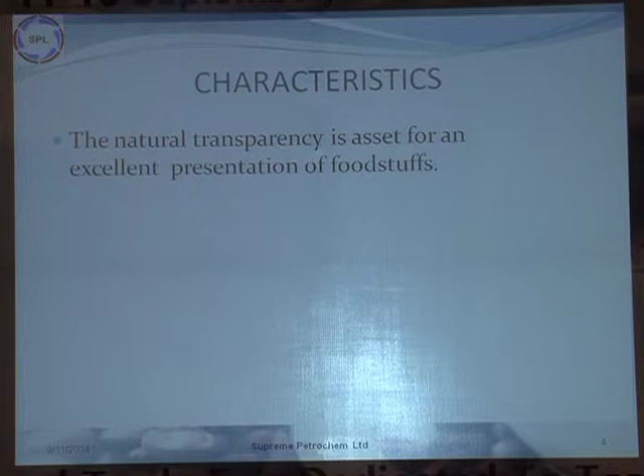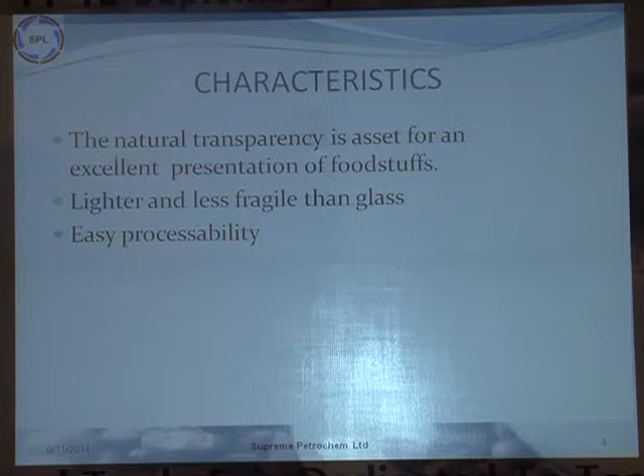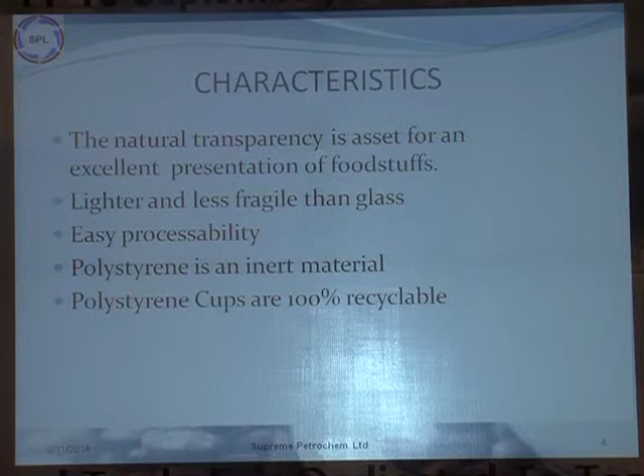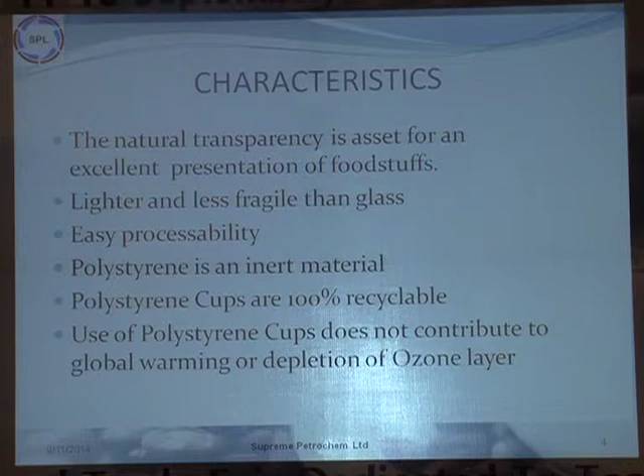So what are the characteristics of this polystyrene material, especially GPPS or clear polystyrene? It has natural transparency, giving an excellent presentation to whatever foodstuff you offer. It's very light and less fragile than glass. It can be processed easily on conventional machines, and doesn't require any skilled labor. It's an inert material, so there are no questions about contamination with food, and it is 100% recyclable. So from the sustainability point of view there is no problem, and when processing these polystyrene cups, they do not contribute to global warming or depletion of the ozone layer, as is feared by many environmentalists.

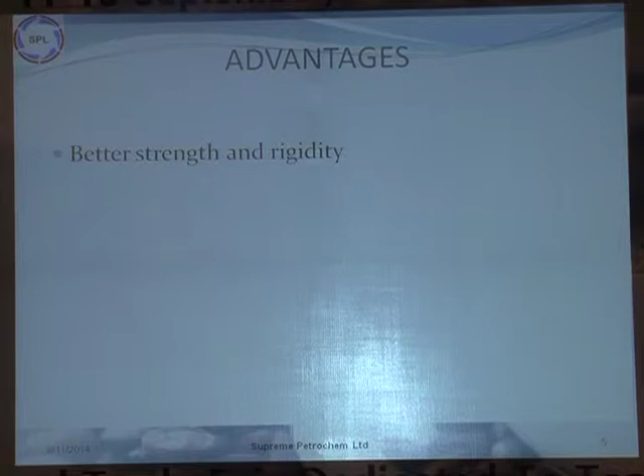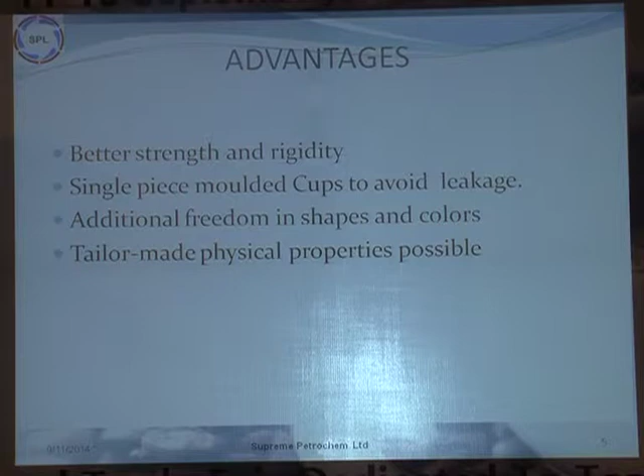The advantages: being light, you get better strength and rigidity. It's a single piece, so there are no possibilities of leakages. You have additional freedom in shapes and colors, and can tailor-make the physical properties. You have increased food appeal, and you get the best value for serving cold beverages as well. Some display examples are given here.

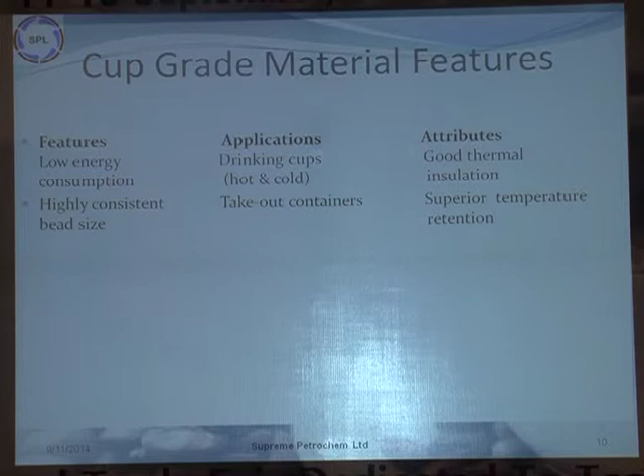What are the features? It requires very low energy. It is used for drinking cups, hot and cold, and the main attribute is it offers thermal insulation. There are some technical terms and other applications which I will skip as they don't have relevance here. In terms of specification, what makes this material so specific?

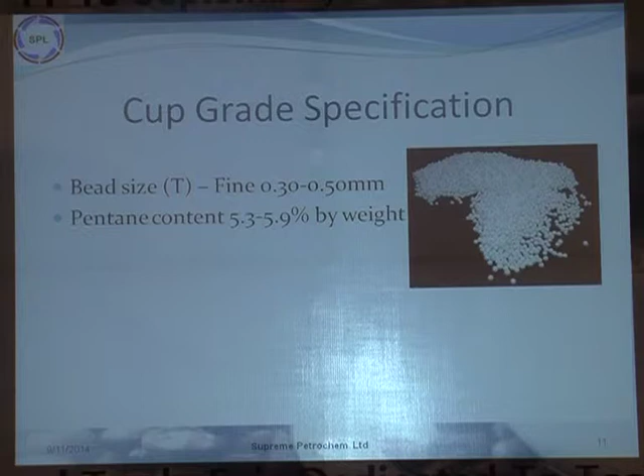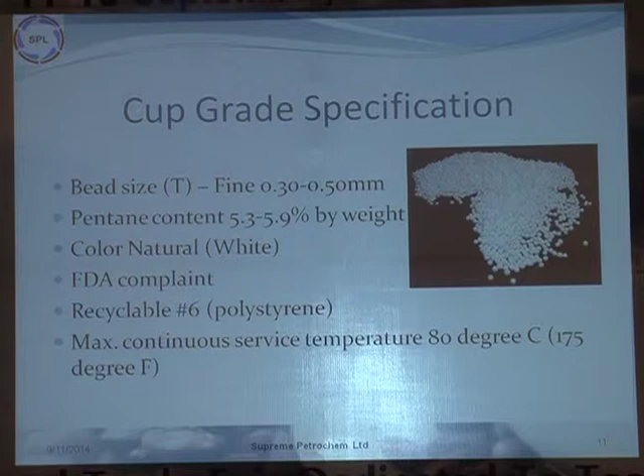The first thing is the very fine bead size. None of the companies in India make this fine bead size of thermocol beads. The pentane content - pentane is a gas used for increasing or making it a foam - has to be controlled at less than 6% by weight. It comes in a very natural color, and it is FDA compliant. We have this material approved by US FDA. Not all materials can be approved by FDA for food contact applications. Again, this is recyclable, being polystyrene, and you can use it for continuous temperatures up to 80 degrees centigrade.

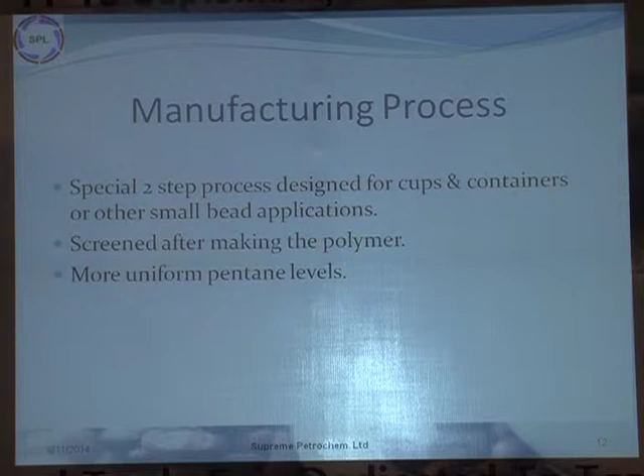What is the manufacturing process that gives this type of specification? It's a very special two-step process, and this particular process is available in the world at only 3 places. We are very proud to say that other than the US and Europe, we are the only company in Asia to have this process for making small bead applications. The screening is done after the polymer is made, pentane levels are maintained uniform, and the resin polymerization is done to get the optimum results.

The process benefits in molding include a uniform product and very good molding cycle times. You have overall higher efficiency levels, and the final product has a better surface quality.

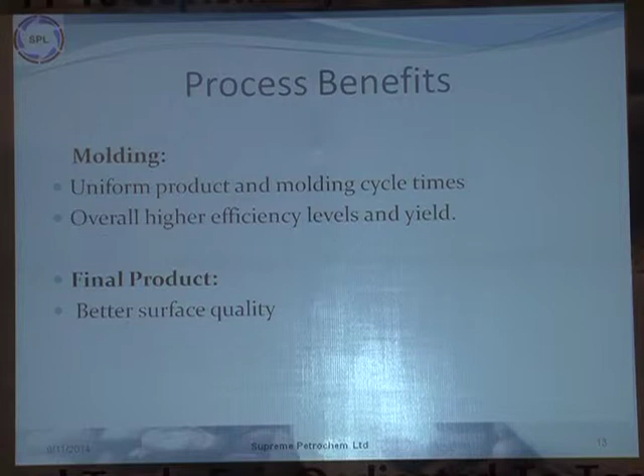I invite all of you to come and have a look at the various samples we have displayed at our stall. It has a very different finish and it's really appealing. The printing also depends upon the surface, and in this case it's much better.

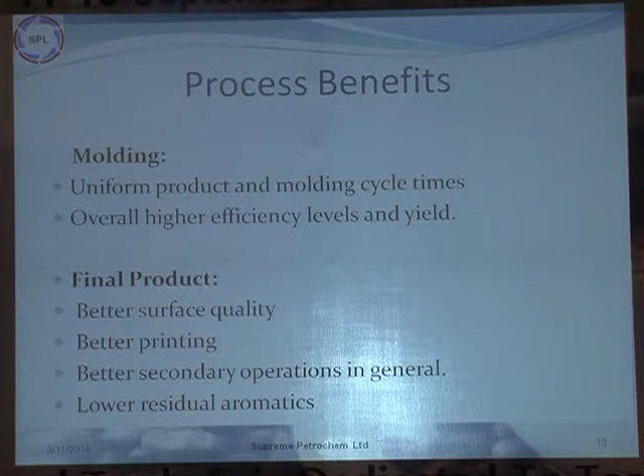Again, EPS cups are made from a two-step process. The material, because of the insulation, keeps hot beverages hot for quite a long time, and it protects hands from burns.

I will show you some examples later on. Again, it's lightweight yet rigid, so there's no problem in holding. And to meet environmental norms, it is CFC and HCFC free, which are known to damage the ozone layer.

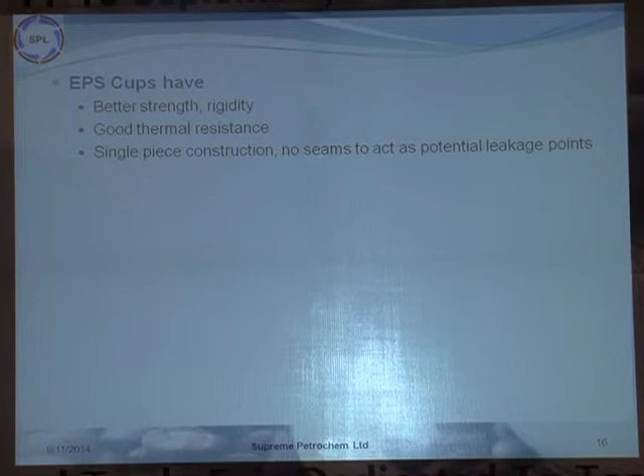Now when you use EPS cups, because of better strength and rigidity, good thermal resistance, and single piece construction, there are no leakages.

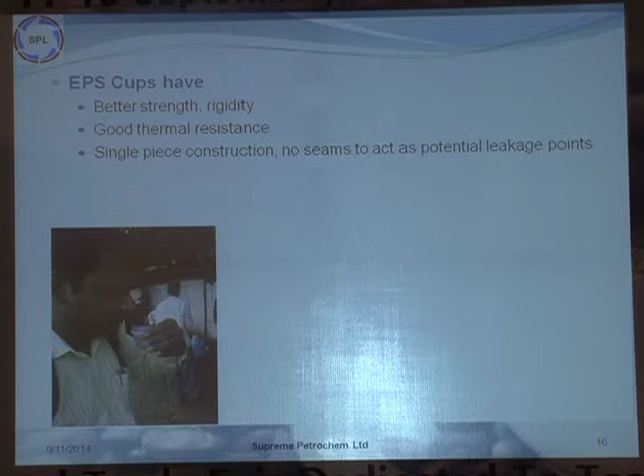It's a very common sight that people hold it at the brim of the cup because they cannot hold it comfortably in the center.

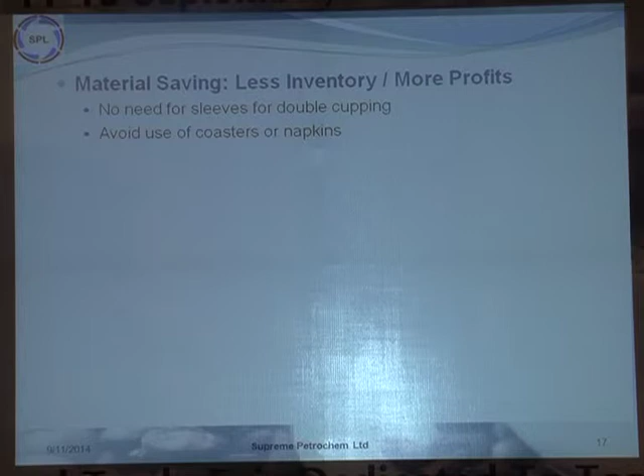How do you get the material saving? Now, because you are using a single piece cup, you don't require any sleeve for double cupping, and you don't require any coaster or napkin to support it. So this is not required.

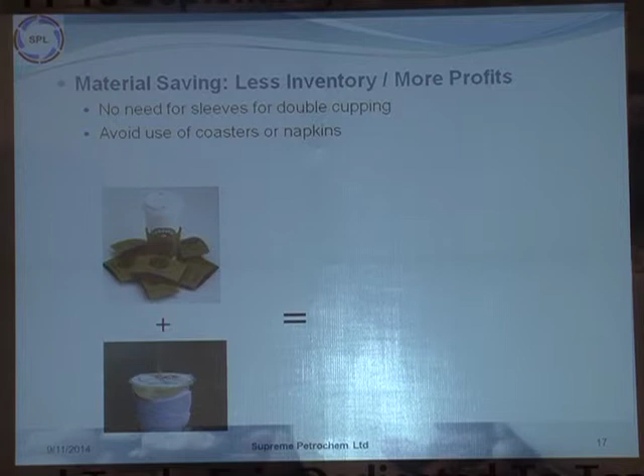Also this is not required. So what you can use is a single cup, and this basically saves money. People normally compare cup to cup, but they don't take into consideration the cost of the sleeve, the napkin, or the additional paper which is used.

The EPS cups in India, traditionally we have seen that they come only in white color. But excellent branding can be done, and you can eliminate paper sleeves.

Branding is possible. Branding is required for product enhancement and advertisement. Now how can it be done?

You can do it by labeling, where you put a paper label on top of it. This paper label is removable, so the two things can be recycled immediately.

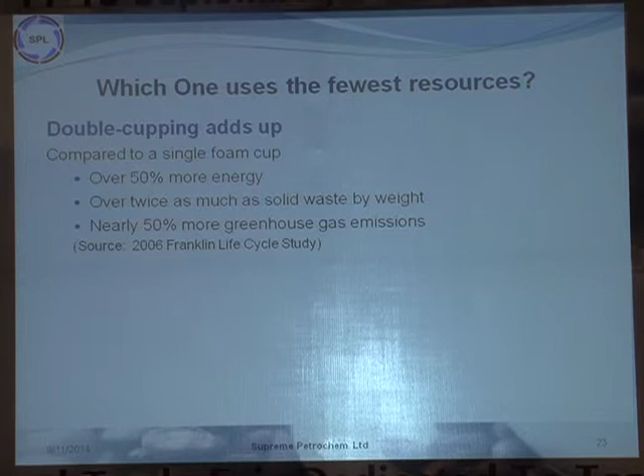Even uncoated paper cups require a lot of steam, chemicals, and electricity to process paper from wood to paper to the paper cup. According to one report, 'Is Paper Better Than Plastic,' a study by Dr. Martin Hocking gives a detailed analysis of how many chemicals are used and their contribution to water pollution.

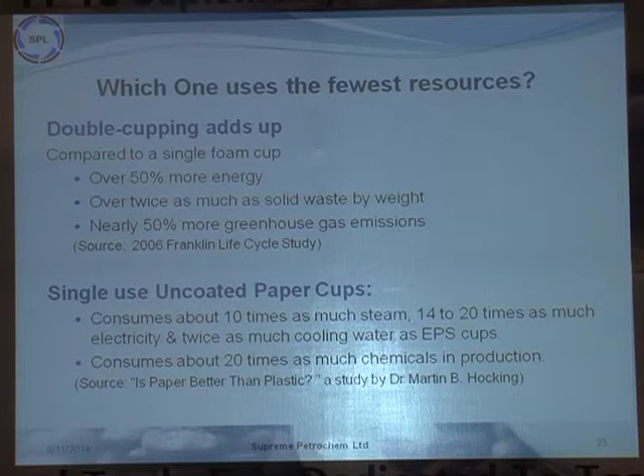These are tabular presentations of disposable cups. Like one ceramic cup - yes, you can reuse it, it can be used a number of times. But the energy used for one ceramic cup could make 39 paper cups, or 1000 foam cups. So within the same energy, you can serve 1000 people versus just one with a ceramic cup.

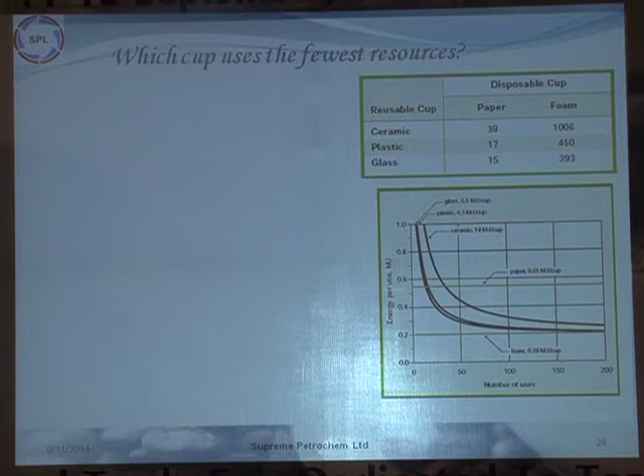Same comparison applies with plastic and glass. Here is the graphical presentation of this. This was again generated by Dr. Martin Hocking on reusable and disposable cups, an energy-based evaluation and independent study in the US.

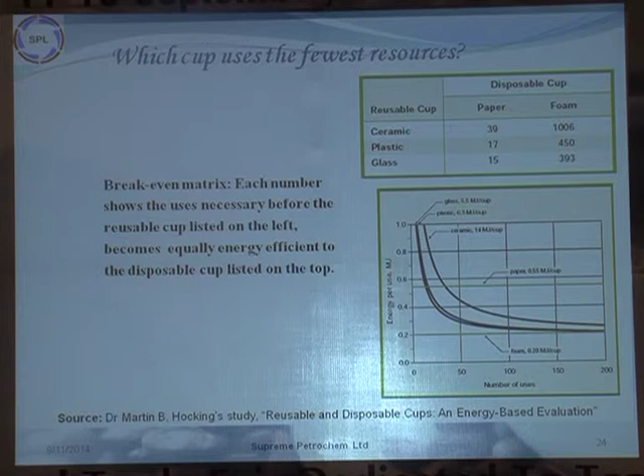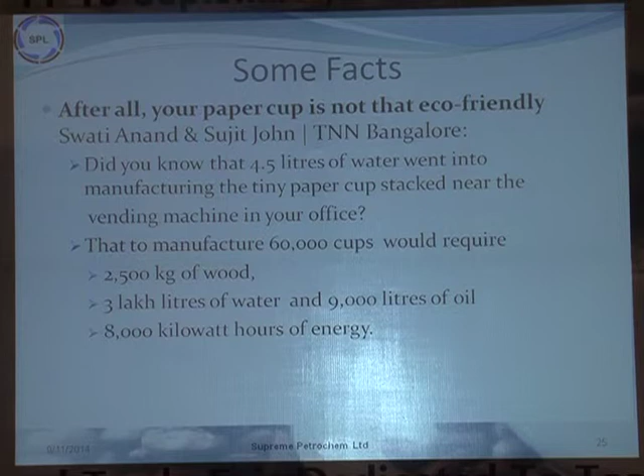Now some of the facts. This came into paper, given by Swati Anand and Sujit John, TNN Bangalore. They said, do you know that 4.5 liters of water is required for one tiny paper cup stacked in the vending machine? In order to manufacture 60,000 cups, based on some study, you require 2,500 kgs of wood, 3 lakh liters of water, 9,000 liters of oil, and 8,000 kilowatt hours of energy. This process creates about 1,300 kgs of air pollutants.

Now this is required because people go by the perception of what they carry and what is carried forward into the market. One perception is that thermocol is not biodegradable. Many things are not biodegradable, but still they are used. What we have to see is that if they are not biodegradable, they have to be reprocessed or recycled. Then they can be sustainable.

What are the environmental benefits? One, both these cups and containers are inert. They are 100% recyclable. But once you recycle, we do not recommend them to be used again for food applications. They can be converted into non-food applications like hangers, beads, frames, etc.

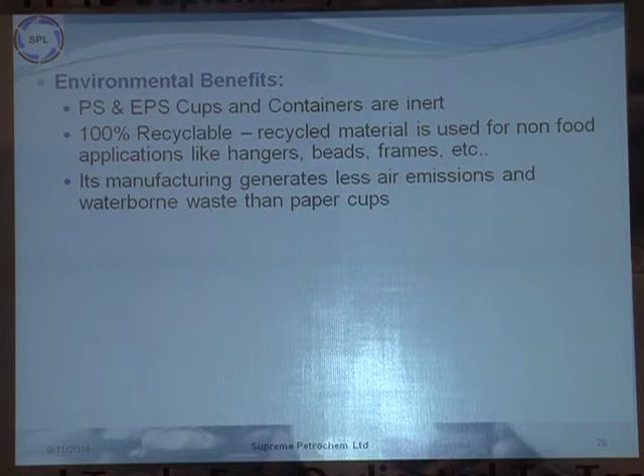Manufacturing of this EPS generates less air emissions and waterborne waste than paper cups. What you require for processing is basically only steam, and because of using steam, you anyway get a sterilizable product. So there is less waste, less pollution, lower energy consumption.

Now here I would be talking about recycling, how easy it is to do the recycling. I will just go to another clip here.

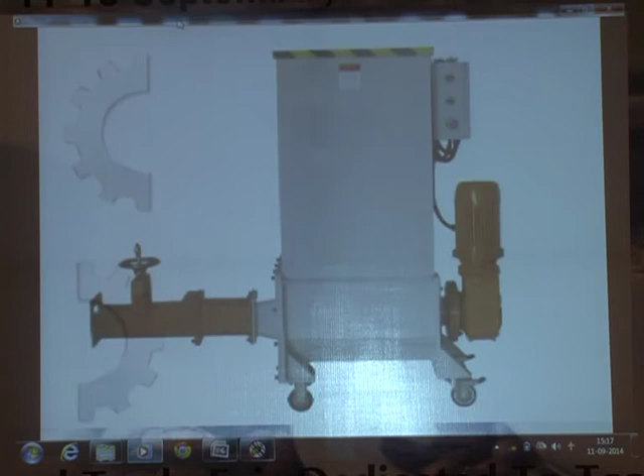This is a very small machine and it's a unique process. Now it is followed in all parts of the world. This is the first step towards processing of EPS. We have brought a small machine, and right now it has been demonstrated at Chowpatty for disposing of the thermocol decorative material which is used for Ganpati.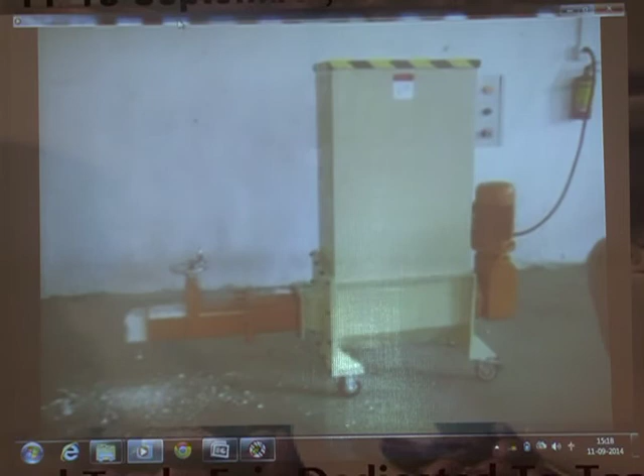What happens is you basically go on dumping the EPS waste, whatever form it is, and it will convert into polystyrene compact blocks which come out from downstairs. It doesn't require any good operator, no skill, very little power, but it reduces the material, the volume, with a compaction ratio of 48:1, and then these bricks are basically recycled. So we have brought a very small machine just to demonstrate, and we have given it right now to BMC D ward.

So after coming to recycling, let us see how eco-friendly an option it is. Even if you don't want to recycle it, the problem today is because of the attitude, the problem today is because of the littering, the problem today is because the product, the EPS, is very bright and it is light. So normally it catches the attraction of people.

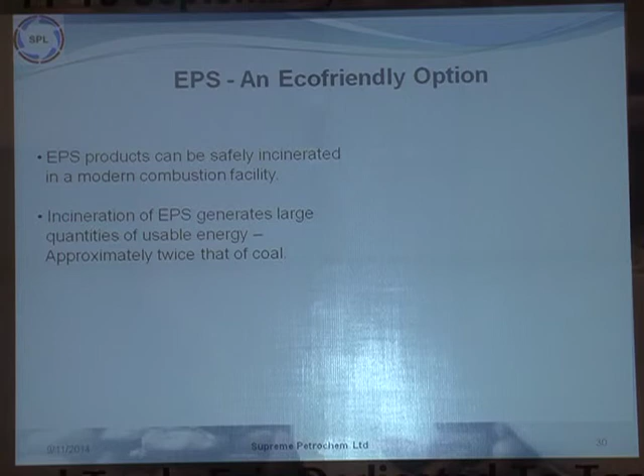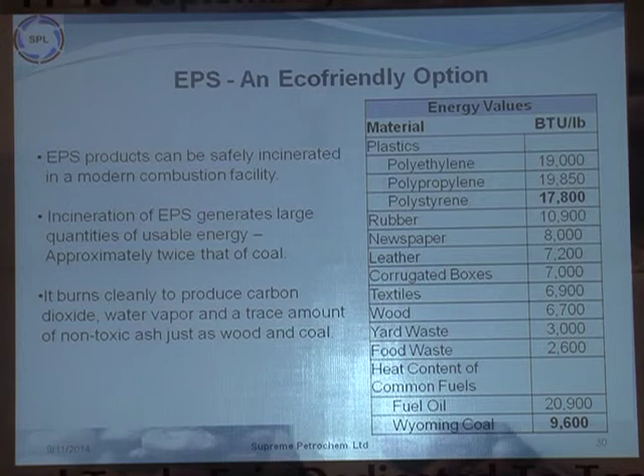So today the consumption of EPS is very low compared to developed countries. There's a lot of potential for people to get into this business. What are the benefits to the companies? They will get the first mover advantage. They will have product differentiation. They will definitely delight consumers. It requires very little developmental cost. The shift is also very easy, and you get an overall increase in value for the product, which can increase the sales volume.

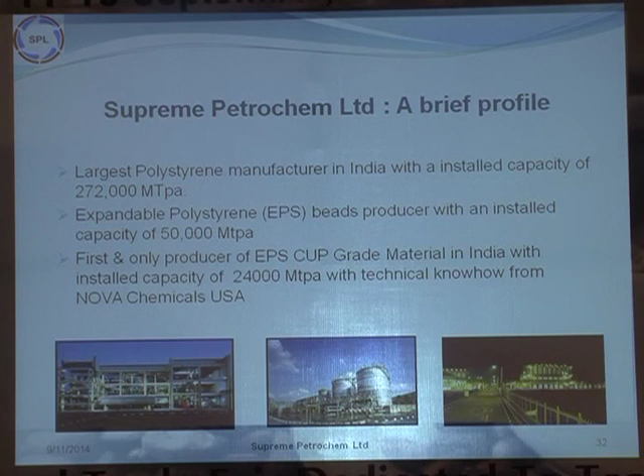Now this product is brought to you by Supreme Petrochem Limited. We are the largest manufacturer in India for polystyrene with an installed capacity of 272,000 metric tons. The plant is at Nagothane. We also make a lot of expandable polystyrene with 50,000 metric tons, for general packaging and construction applications. And the third line, we have an exclusive line for making EPS cup grade material. We are the first and only producer in India, and probably in Asia, with an installed capacity of 24,000 tons and technical know-how from Nova Chemicals, USA.